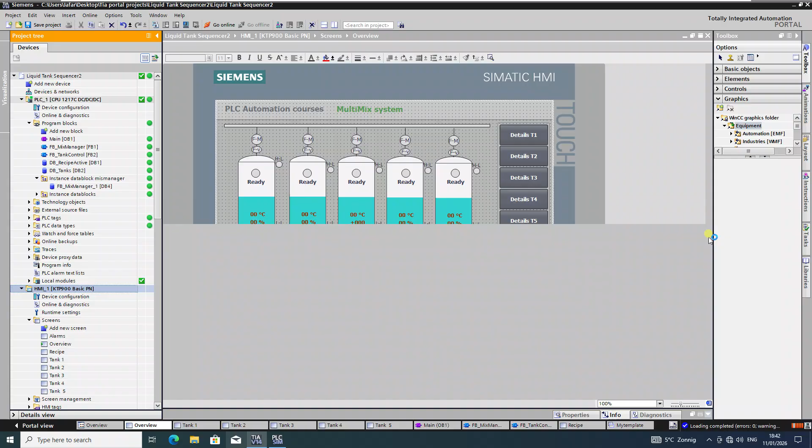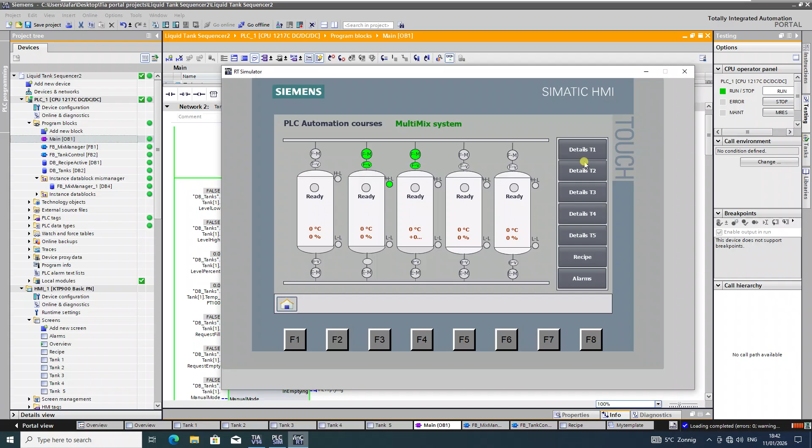All right. I will go to OB1. Make it online. This is my tank 1. In my tank 1, I'm going to manual mode. Manual mode is on. It's on, true, when I fill it. So, in filling, the valve is open and the motor is turning.

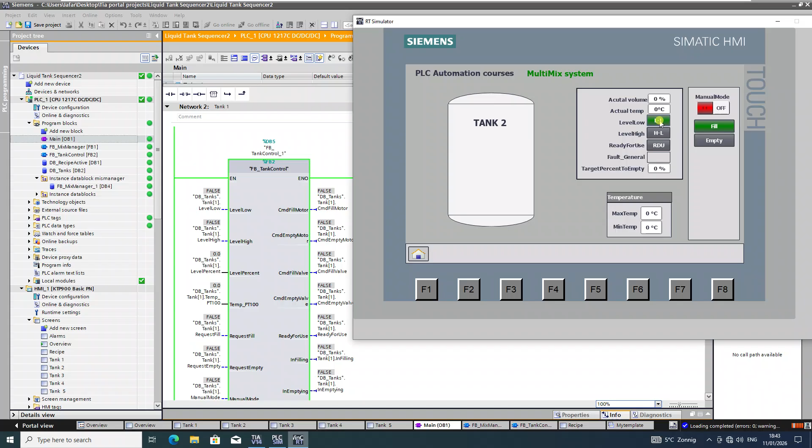Now I'm going to empty, on, empty motor, empty valve, and in emptying. Alright, so tank 1 is working. We are going to tank 2. Let's have a look here. Turn on, filling, and 2. Oh, it's turned off. Okay. The low level. So tank 2 is not working.

First of all, we are going to have a look at the manual mode. So this is not working, you see. This one, I think there is no connection. Tank 2, properties. Oh, weird. It's normally tank 1. Okay, let's put it 2. Normally it should work.

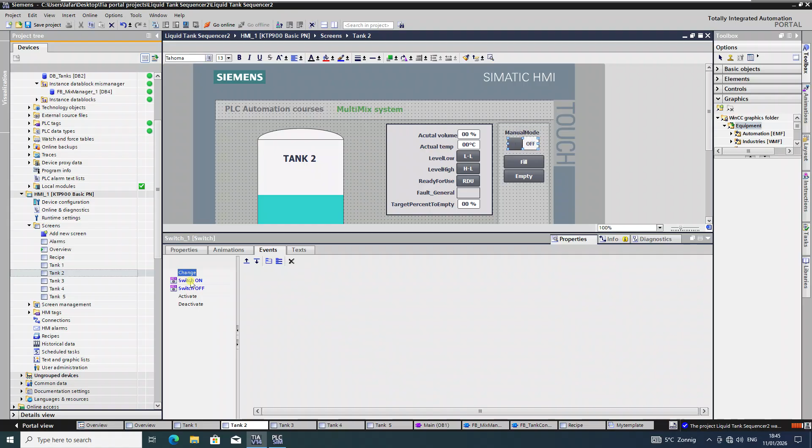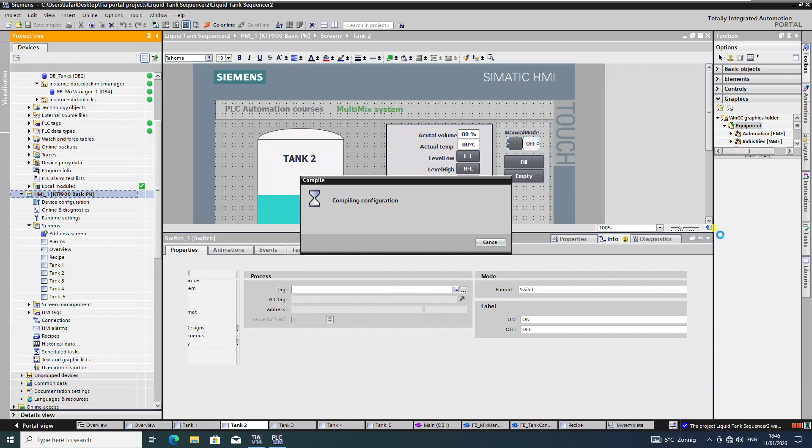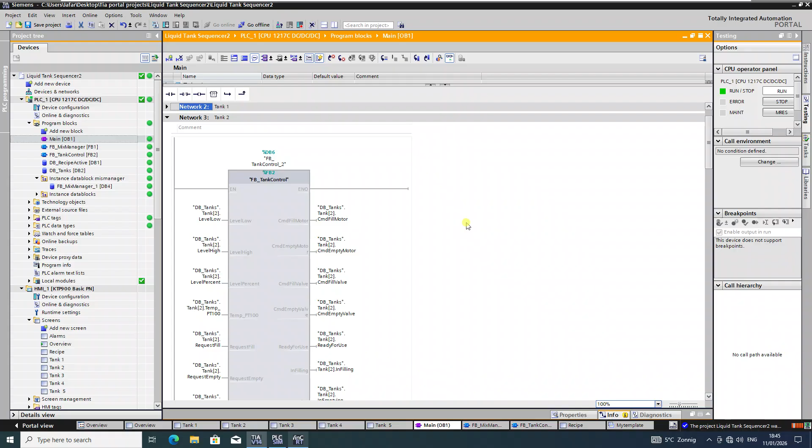Now, the events. Yeah, the problem was here. So when you are using the event, we do not use these process tags. Alright, we go back to our... it was tank 2, tank 1, it's tank 2. Manual mode is right here. Turn off. Now it's working.

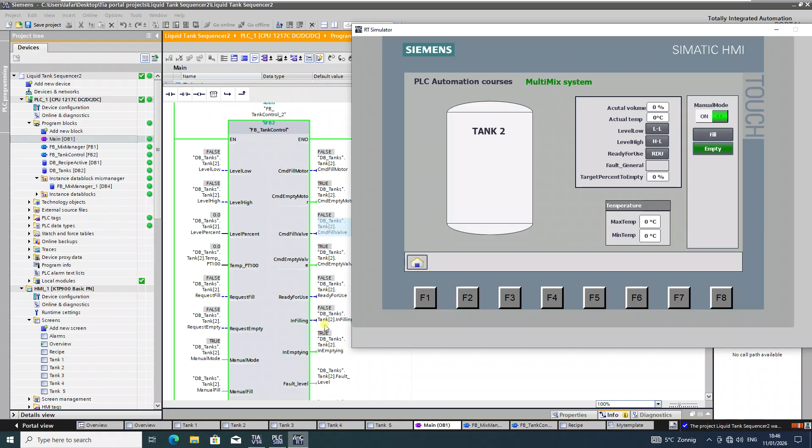You see? It's working. False and true. Right? Okay, I'll turn it on. I'll fill it. In filling, the valve is open and the motor is turning. Alright, so I will stop filling and I'm emptying it. The emptying also works very good.

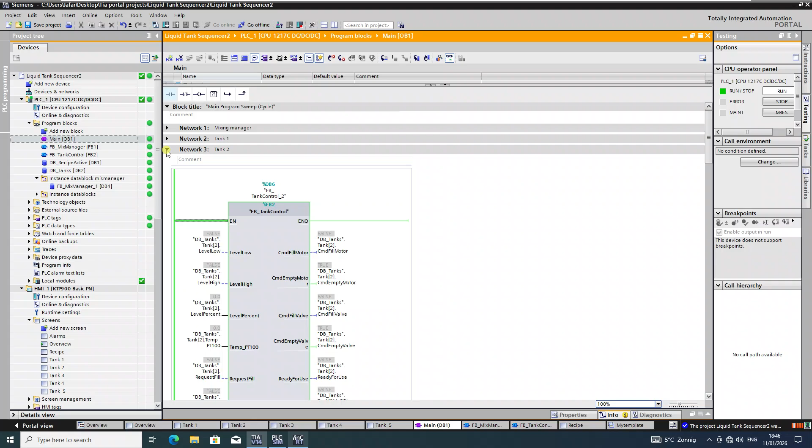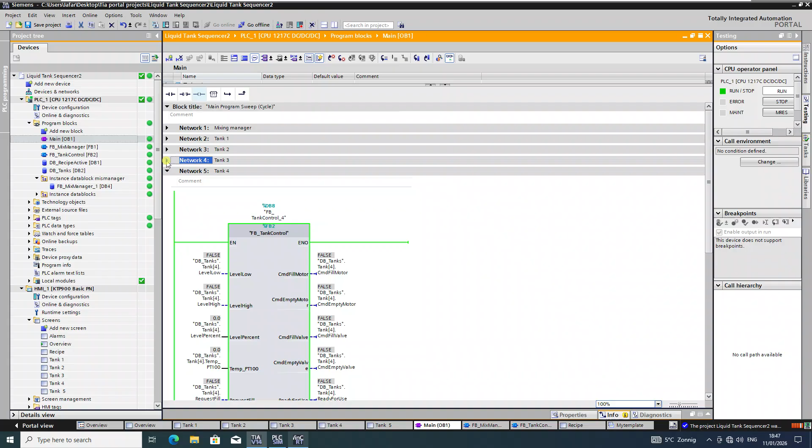Okay, let's go to our tank 3. Tank 3 is here. Manual mode is already true. The filling is already true, okay. In filling, we stop filling, we empty manually, it works as well. Tank 4 and also the FB of tank 4. Tank 4, alright. Yes, it's working. Now we are going to fill it. It's working. Stop filling, we empty. It works as well. So tank 4.

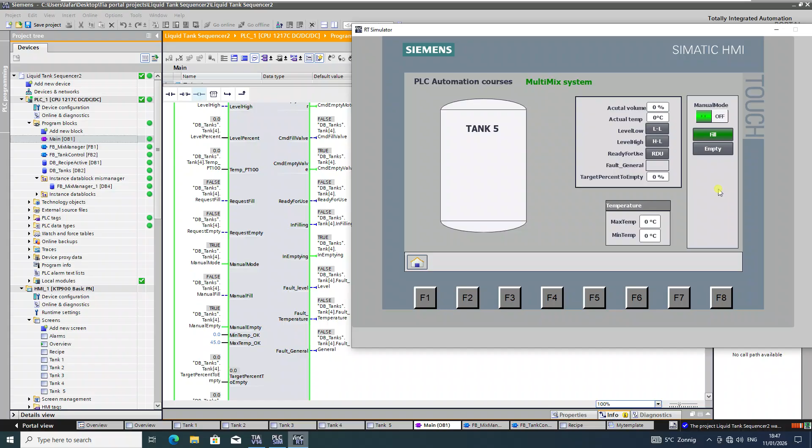By the way, this is the indicator of the pump, empty pump, and the CMD is here. Valve and motor is here. And we go to tank 5. Yes, we turn on, we fill. It should be turning this one, and now we are going to stop filling, emptying. Yes, they all work. And now let me do something here. The low level. Okay.

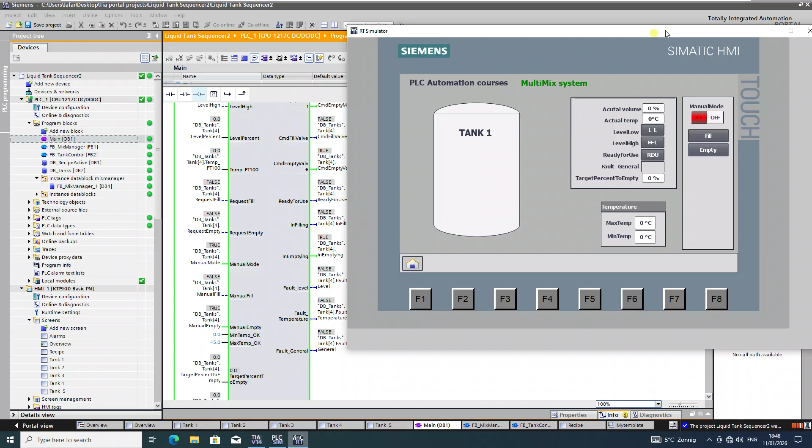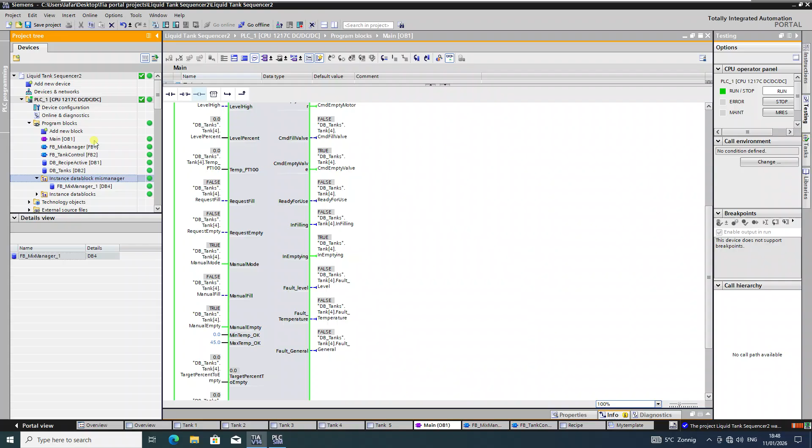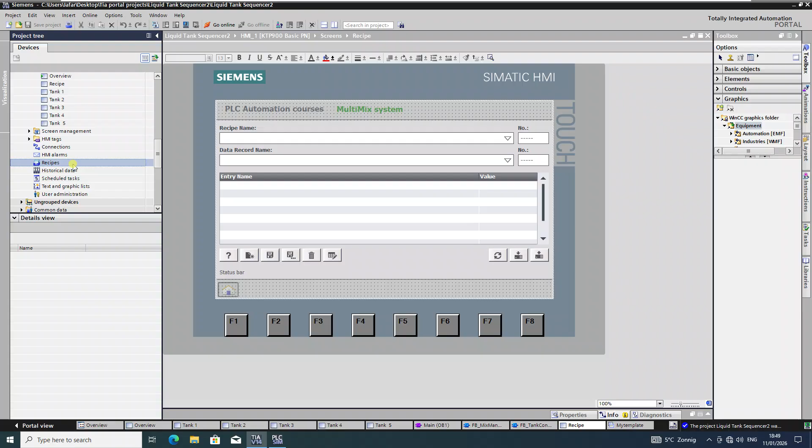To the next part. So we have connected our tags successfully, and it's working very good. And now the very important thing. Let me go offline, it's much better. Recipe. In the past video we added this recipe viewer, and today we are going to make it able to put some recipes into our system. And now we go to recipes.

I will create a new recipe. I will call it recipe 1. I won't change it. So in recipe 1, what do we have to put? Let me check it to be faster. So in the recipe, we have to add percent tank 1, percent tank 2, percent tank 3, percent tank 4, percent tank 5. We just copy and paste it.

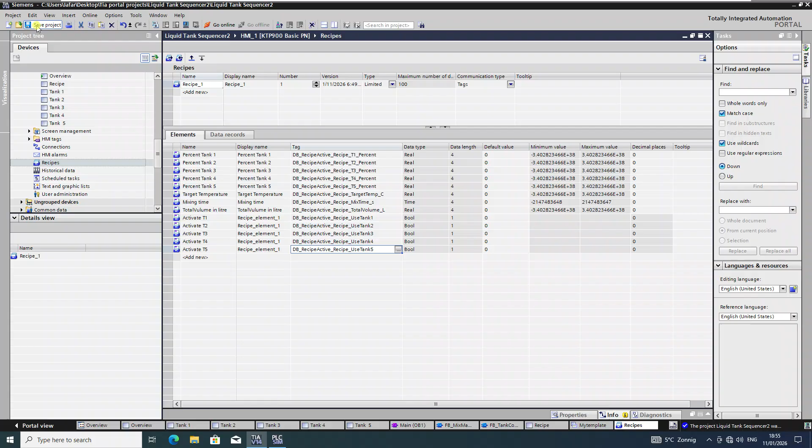Okay, we just delete, delete, and also delete. Tank 3. Tank 5. Okay. We are going to our recipe viewer. We go to properties, and we add a recipe here, recipe 1. All right. Done. We save it.

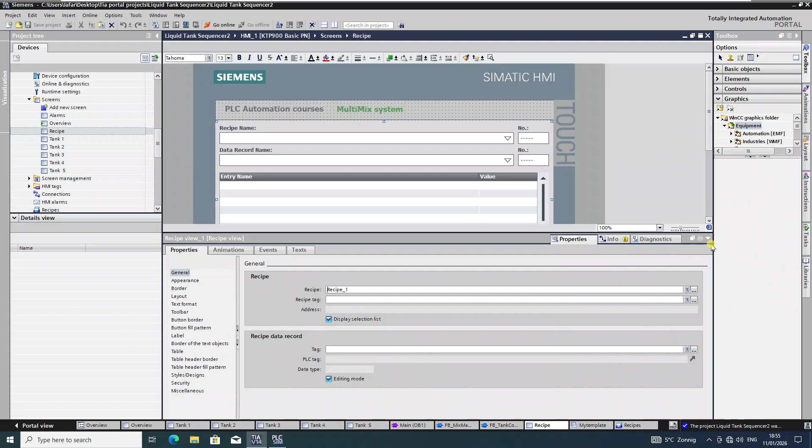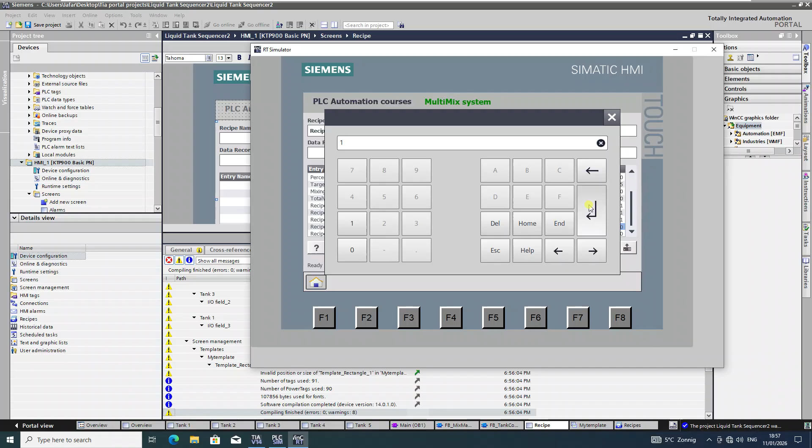It should be 5 seconds mixing. 5,000, yes. So now, the temperature has to be like 25, and the total volume in liter, we are going to 500 liter. And now we enable tank 1, tank 2, we just enable all of them. We save our recipe and load it.

Loading completed. So when we go to our recipe, it should be here. Yes, we see all of them are true, 5 seconds of mixing, and total volume, we are producing 500 liters of the liquid, and from each tank this percentage. So the 500 liters of liquid or water are a mixture of 5 tanks. From each tank this percentage will be used. We are now at 17 minutes.